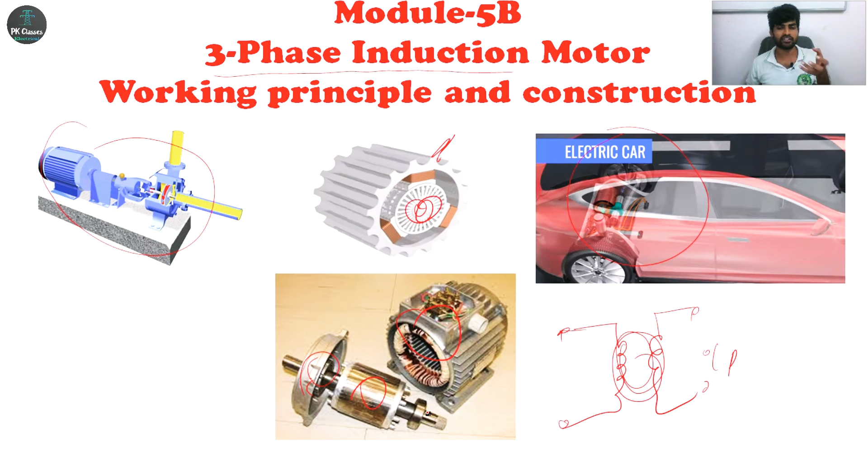These are all the parts. This is a stator, this is a rotor, and this is an end cover. Inside, there is a bearing present, a shaft will be there, and slots will be there. We'll discuss each one by one now.

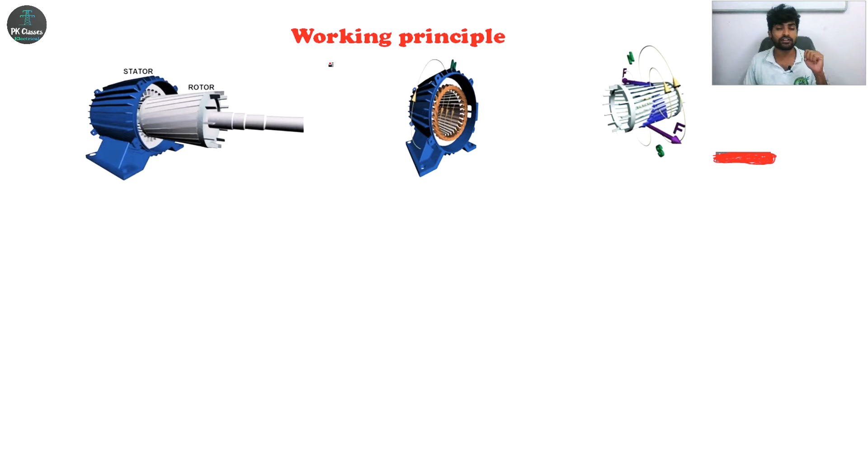Let's see the working principle of the three-phase induction motor. The name itself indicates it works on the principle of Faraday's laws of electromagnetic induction. These are the parts of the three-phase induction motor: stator, the stationary part, and rotor, the rotating part of the machine. The stator has stator slots to hold the field winding because we want a rotating magnetic field.

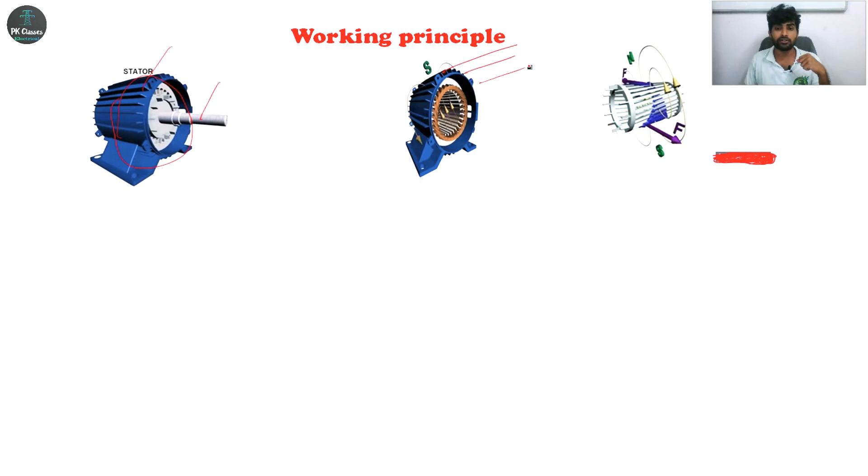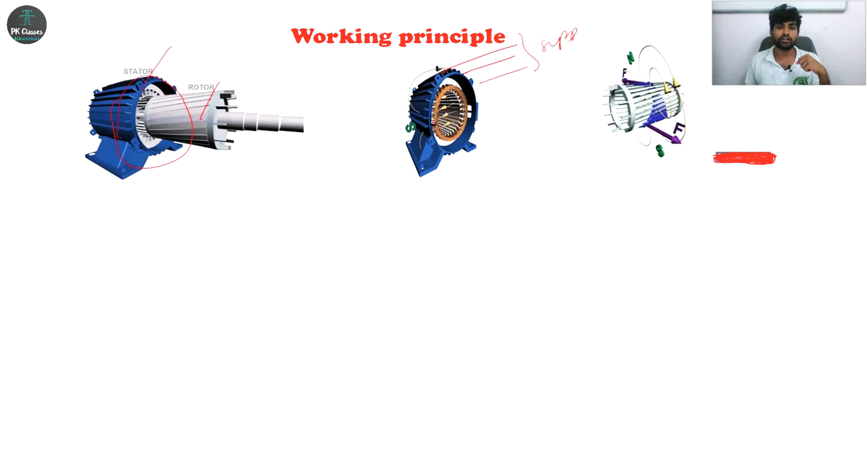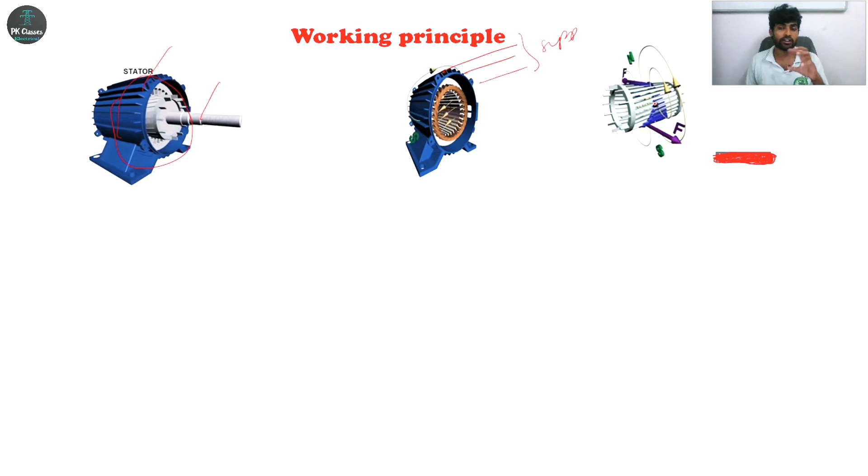I'll be giving three-phase supply to the stator. What happens? It produces a circular, rotating magnetic field inside the stator. If you insert the rotor into this periphery, this rotor cuts the rotating magnetic field, which induces a current. If a conductor carrying induced current is placed in the rotating magnetic field, it experiences a force, so the conductor starts rotating.

Let's see the working principle in detail. There is a rotating magnetic field from the stator. This is the stator, and this one is the rotor, rotating like this. Supply is not yet given in figure 1, then figure 2.

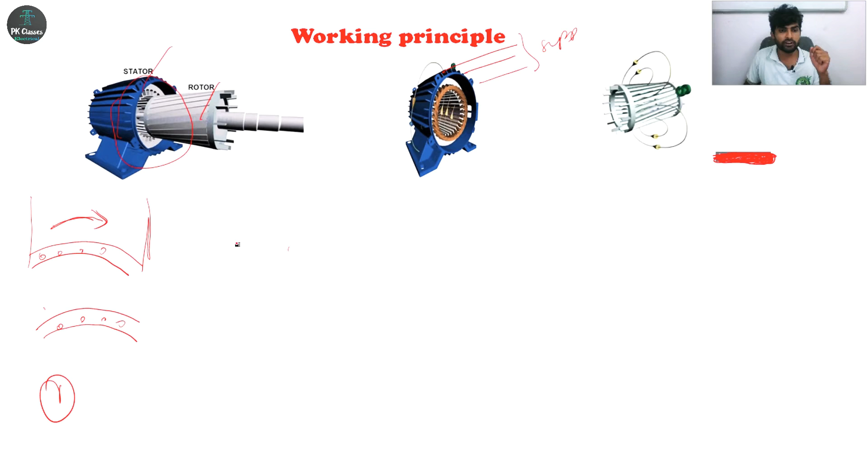Let's see each diagram one by one. In the first diagram, supply is not given to the stator, so there is no rotating magnetic field. This is the stator, this is the rotor, and rotor bar conductors are present. In the next diagram, supply has been given, which produces a rotating magnetic field in the stator like this, and the conductor in the rotor is stationary.

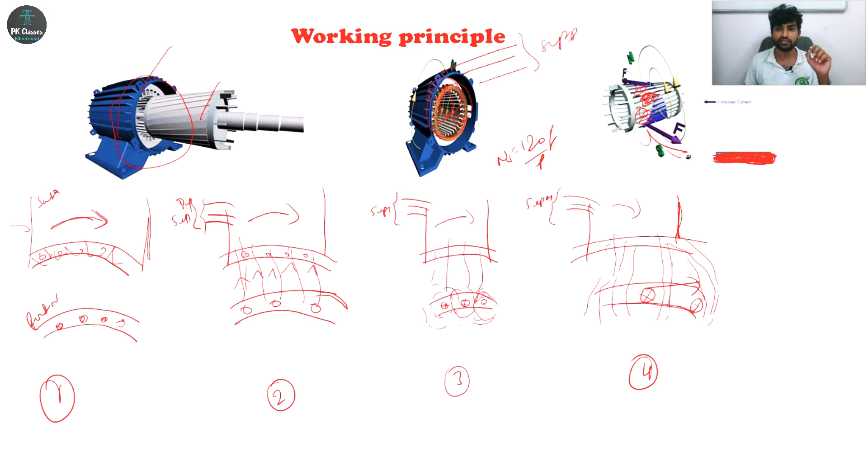So in the second case, supply has been given, producing a rotating magnetic field that continuously rotates at speed ns equals 120f by p. This bar conductor is cut by the magnetic field, which induces a current. According to Faraday's laws of electromagnetic induction, when a current-carrying conductor is placed in a magnetic field, it experiences a force like this.

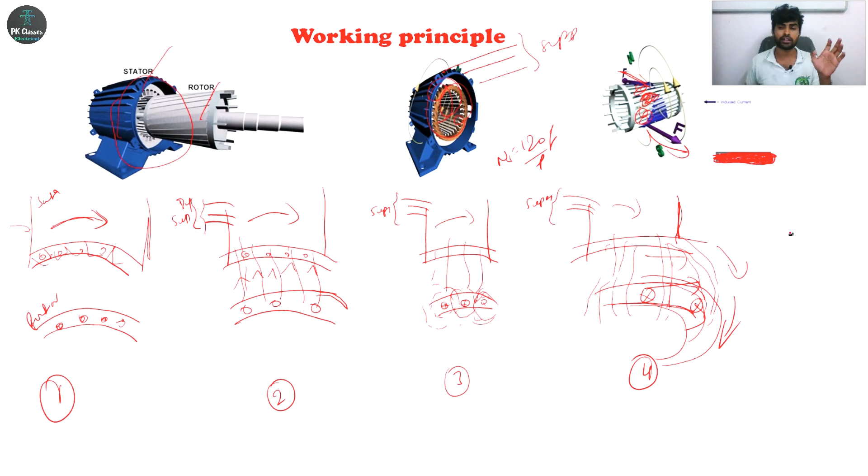It's like the stretching of rubber, from high flux density to low flux density, so it starts rotating in the same direction. If the rotating magnetic field moves in this direction, the rotor will rotate in the same direction. So this is the principle of the three-phase induction motor.

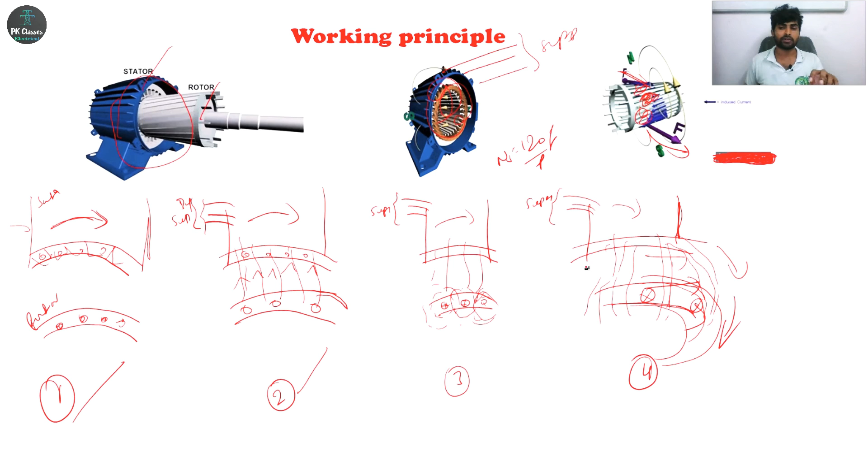First, supply is not given. Then supply is given, a rotating magnetic field is present, and this rotating magnetic field cuts the rotor bar conductor, inducing a current. According to Faraday's laws of electromagnetic induction, the current-carrying conductor experiences a force in the magnetic field, so the conductor starts rotating. That's all — this is the working principle. Just write it in your own words, don't mug up the concept.

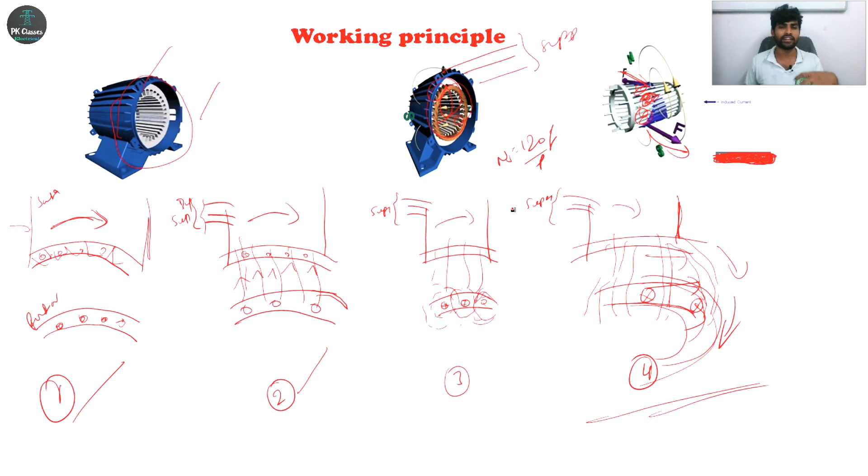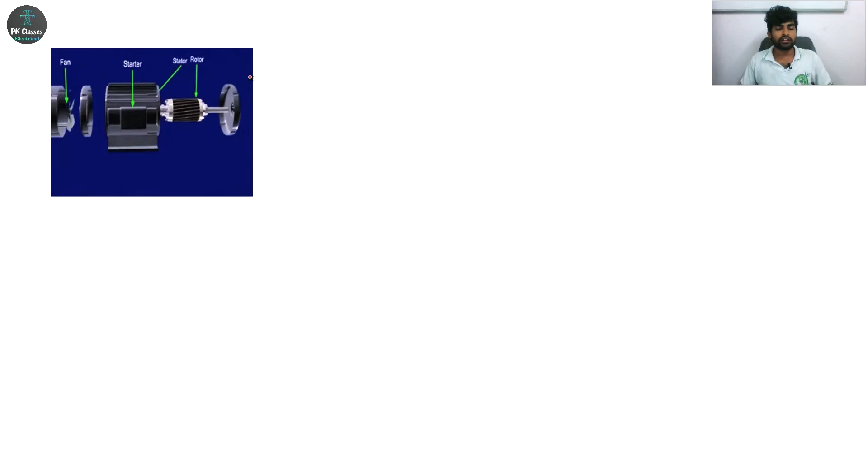Let's see the construction of the three-phase induction motor. This is the stator, this is the rotor. I'll cut it into half and draw a sectional view. These are the parts of the three-phase induction motor. I'll draw a cutout section.

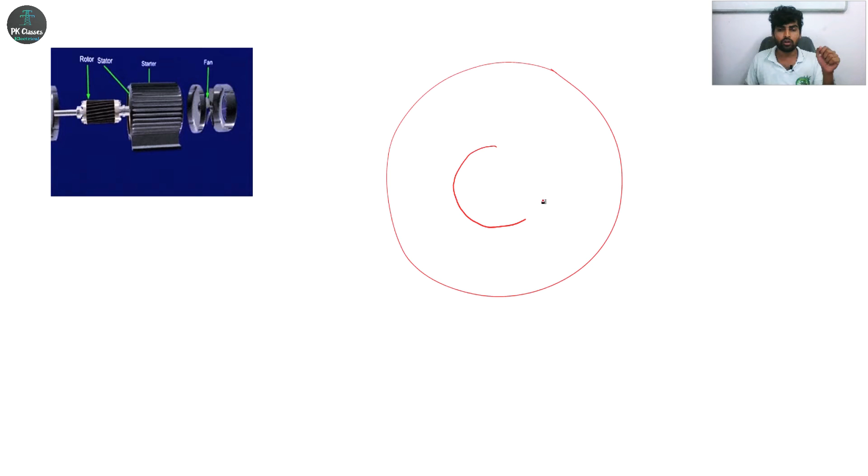This is the yoke, and here there is the rotor and the rotor bar conductors. This one is a squirrel cage rotor, just to consider, and this one is the shaft. So I'll draw it.

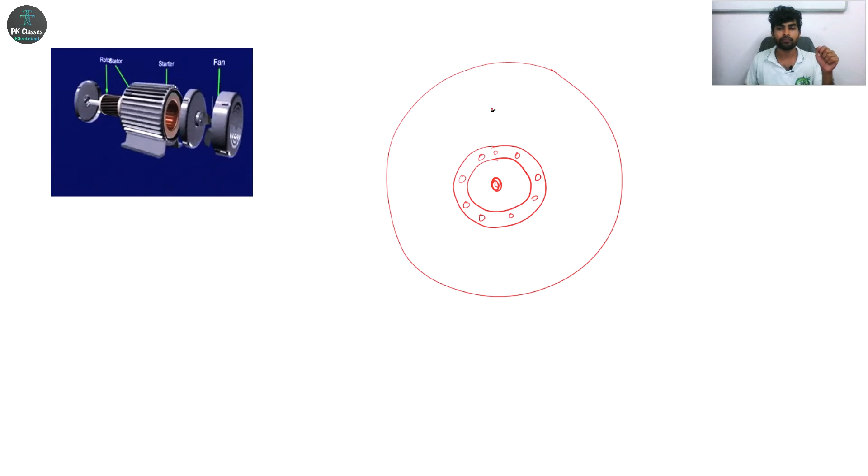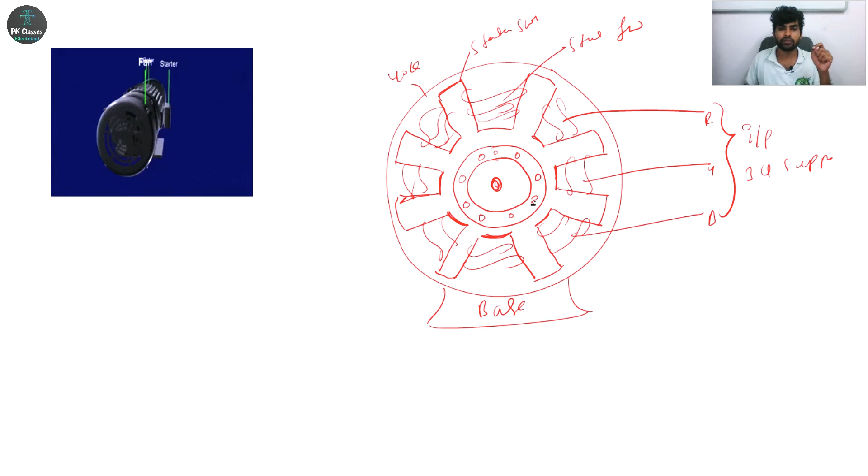We'll mention the parts. This is a yoke and stator slots, and on the stator, field winding. This is the rotor bar conductor or armature conductor. Okay, this one is the shaft. Right. So we'll explain one by one.

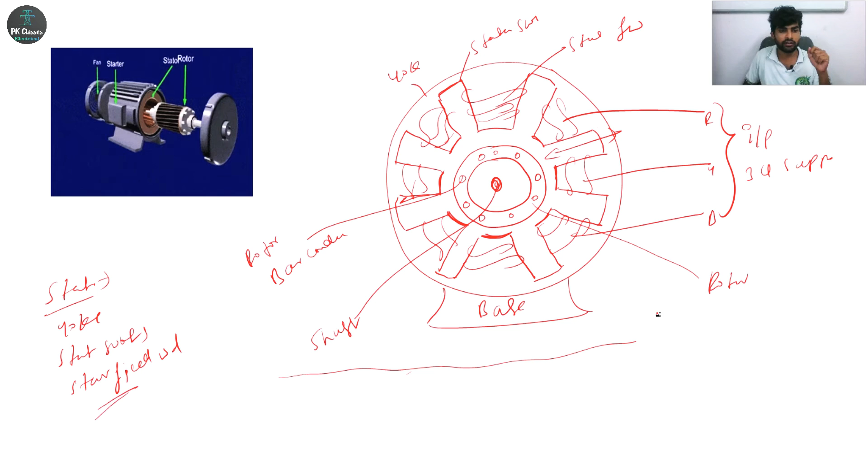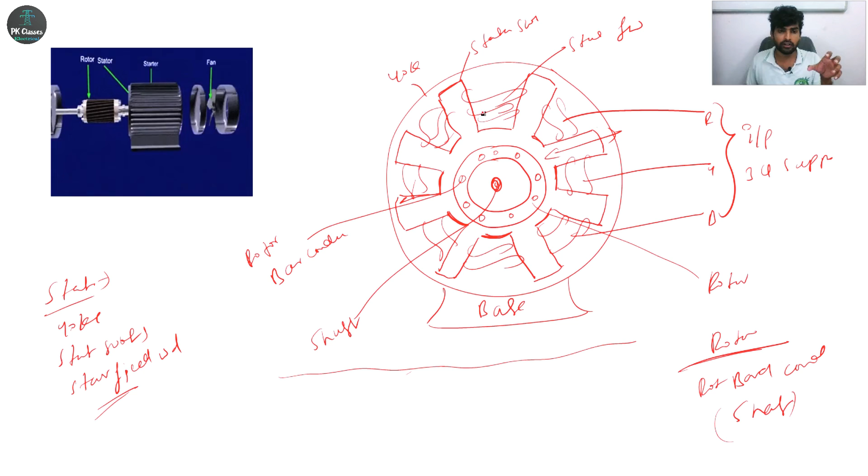This is the stator part. So the stator has a yoke, stator slots, and stator field winding. And then rotor bar conductor and shaft. Okay, we'll explain stator and rotor now. So this part is this one, and this part is this one. Stator is the stationary part of the machine, rotor is the rotating part of the machine.

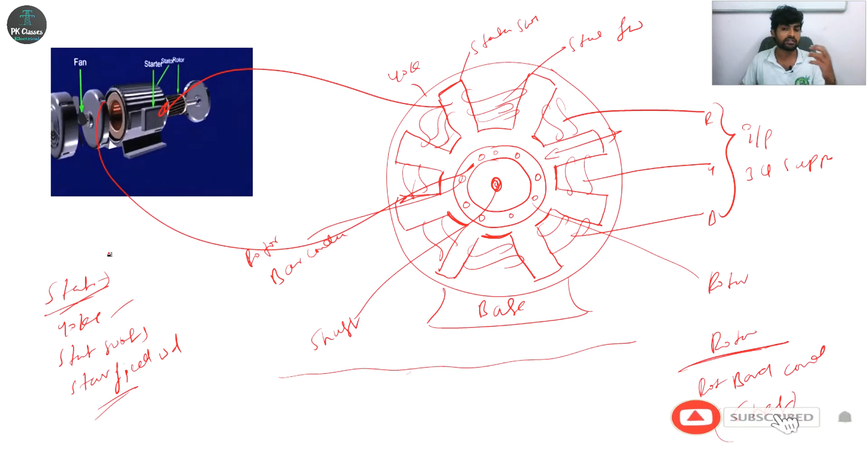Yoke is the outer cover of the machine or frame for the machine, and also it avoids entry of dust particles and moisture inside the machine, and it provides mechanical support to the stator slots. Next, there are stator slots for holding the stator field winding. Next, there is a field winding to produce a circular magnetic field.

If you give power supply to the field winding, I mean the stator conductor, what happens? It produces a circular magnetic field at the speed Ns = 120f/P. Okay. And next there is the rotor. Rotor is the rotating part of the machine. So there is a bar conductor.

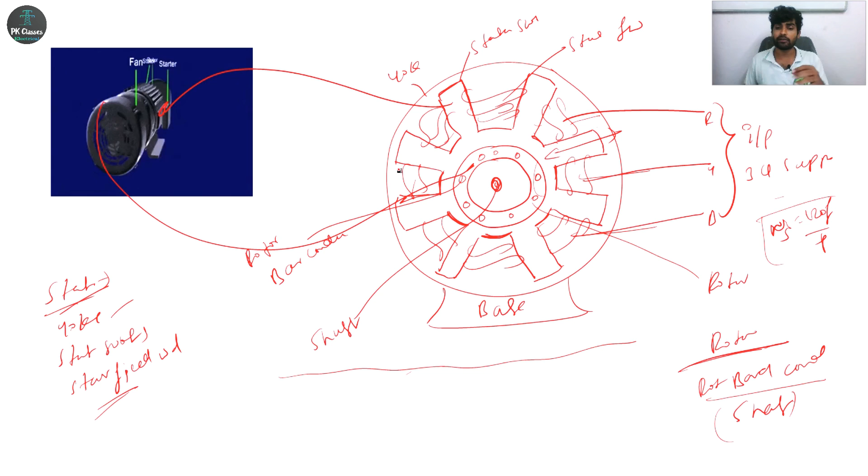When the bar conductor cuts this rotating magnetic field, what happens? It induces current. So if a conductor carries a current in the magnetic field, what happens? It experiences a force. Next there is a shaft to hold the overall rotor. This base is for mounting purpose.

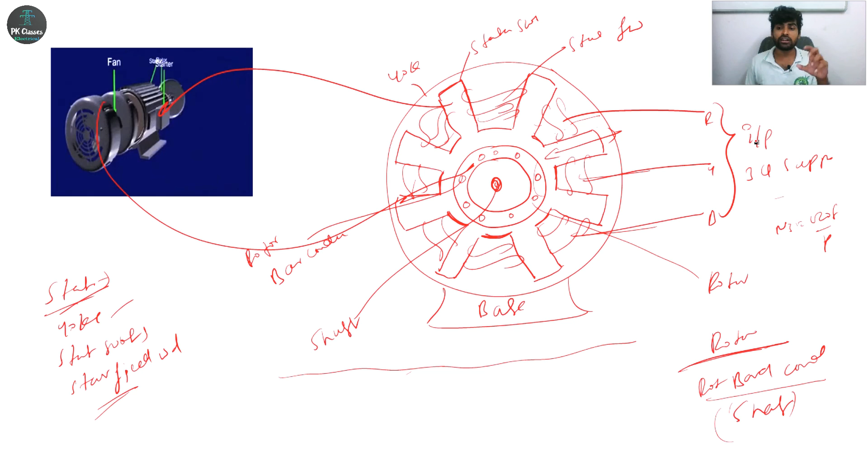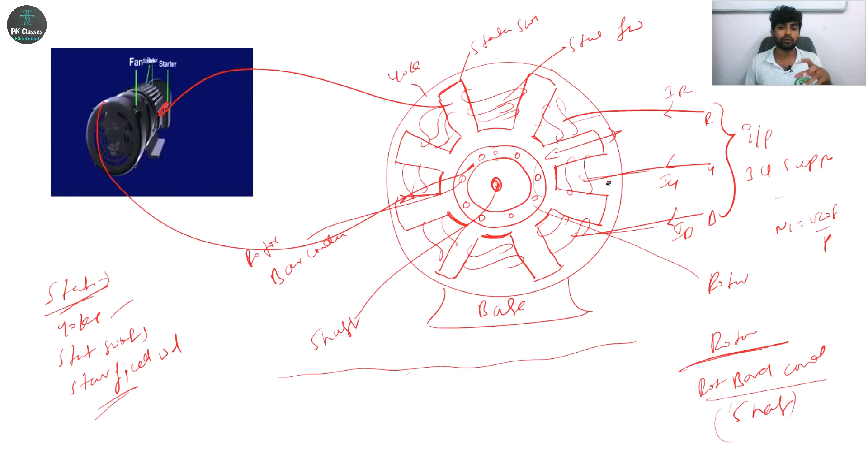Let's see how exactly a three-phase induction motor works. We are giving three-phase supply voltage. Due to voltage, current will flow through the winding, that is IR, IY, IB. Due to current, what happens in the coil? It produces a magnetic field, right? That magnetic field rotates at a speed of Ns = 120f/P. That's why it is called a rotating magnetic field.

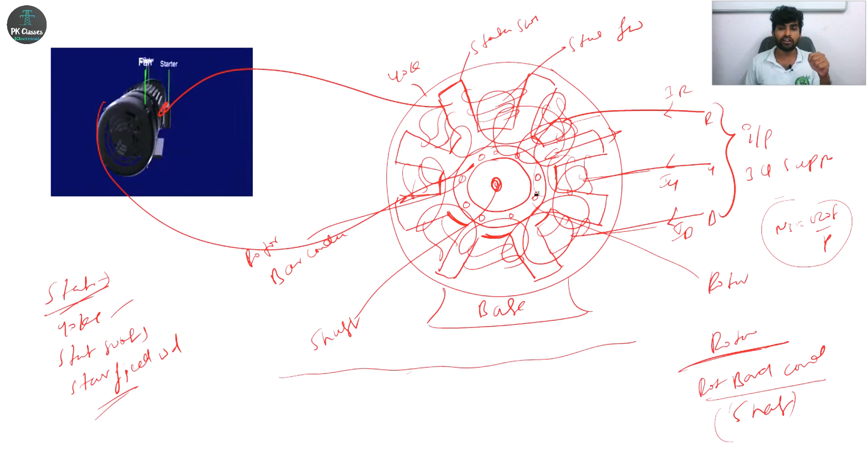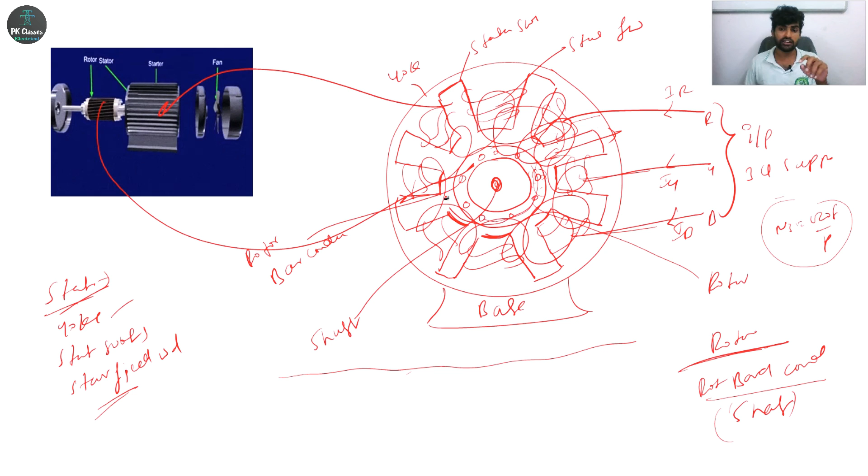It rotates. See, when this bar conductor is cut by this rotating magnetic field, what happens? It induces a current. See here, it induces current. So according to Faraday's laws of electromagnetic induction, when a current carrying conductor is placed in a magnetic field, it experiences a force. It starts rotating in the same direction. That's the working of a three-phase induction motor.

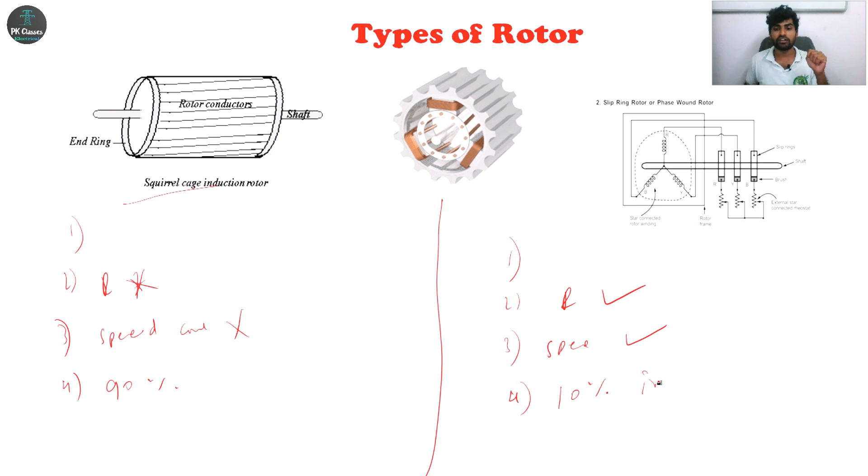Okay, just consider this one is a rotor, not a stator. We have to give a stator input like this. RYB supply we have to give, then only this rotor rotates, right? And here there are skewed bars. Skewed bars are absent here. Skewed bars: here present, here absent.

Why did they make skewed bars here? If it were straight, the rotor slots and stator slots would interlock with each other. What happens? It will jam. Okay, it will not rotate. That's why skewed bars, and to eliminate harmonics. Right, like this structure. This is a squirrel cage rotor. This one is a stator. If you give power supply, the rotor starts rotating due to the rotating magnetic field.

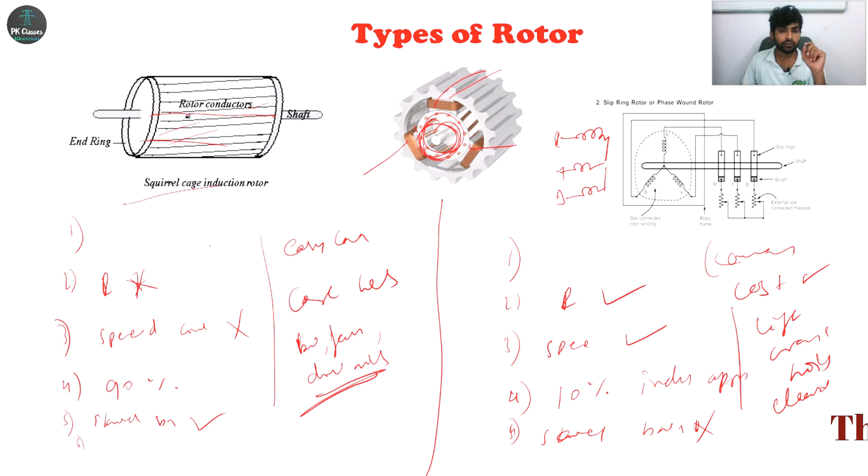Easy construction here, but this one is complicated. And cost is less here, cost is high there. These motors we are using in blowers, fans, drilling machines, milling machines, etc. But this one is for heavy load applications: lifts, cranes, hoists, elevators. Skewed bars are present, welded in the end rings, but here there are no skewed bars. We can add resistance here. Here adding resistance is not possible.